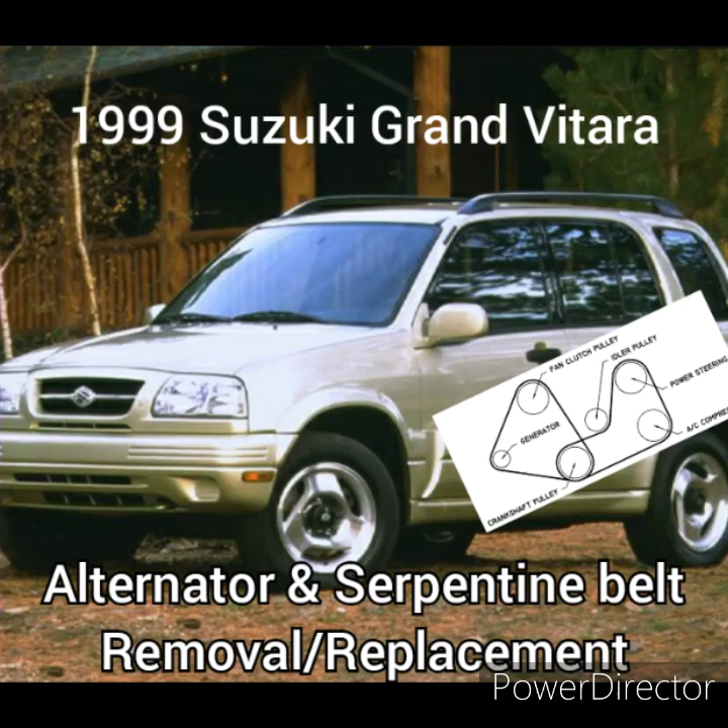Jason here again, working on my 1999 Suzuki Grand Vitara. It's been about two years since I put out the first video on replacing the radiator. Never had any problems with it since then, and then the alternator belt breaks, so I had to replace that.

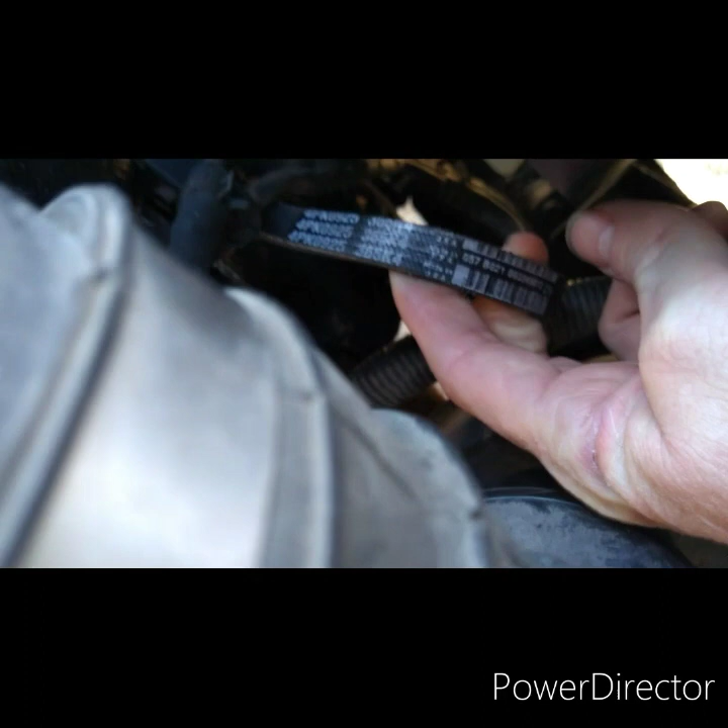What I've gotten done so far is this. This is the new belt for it. As you can see, let me get it turned right here so you'll be able to see the numbers on the belt. That way you know what belt you need for the alternator to replace it.

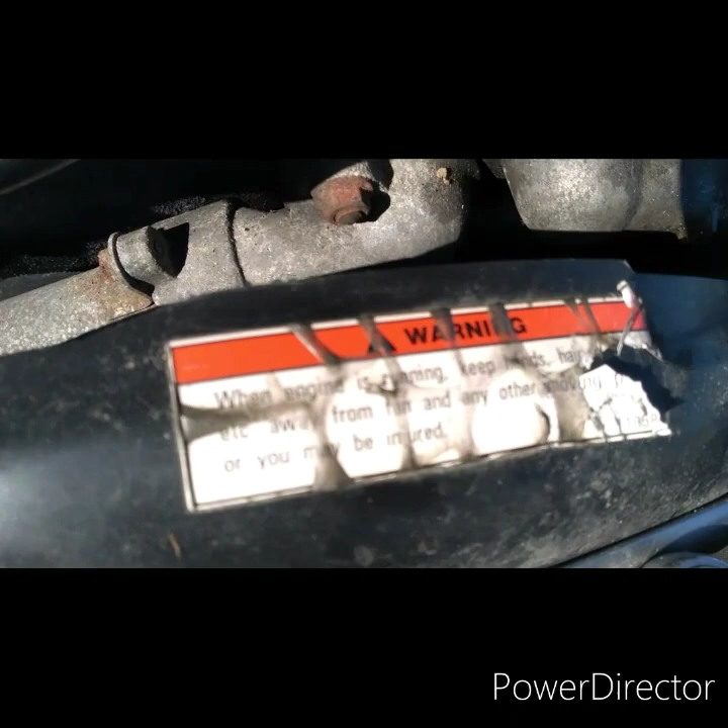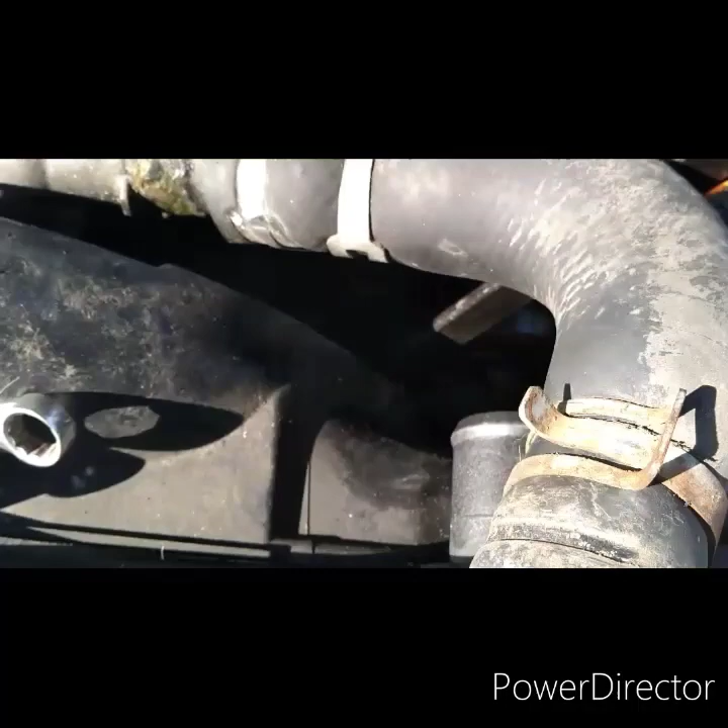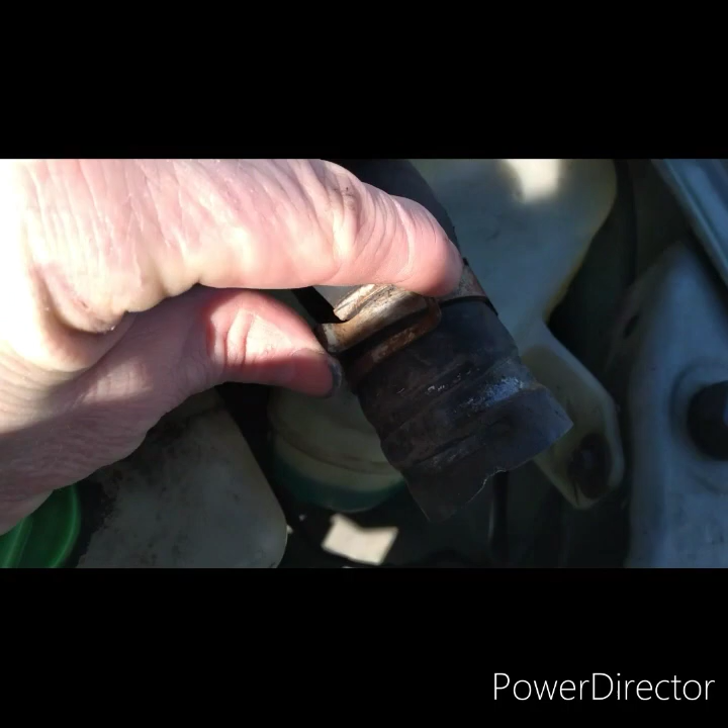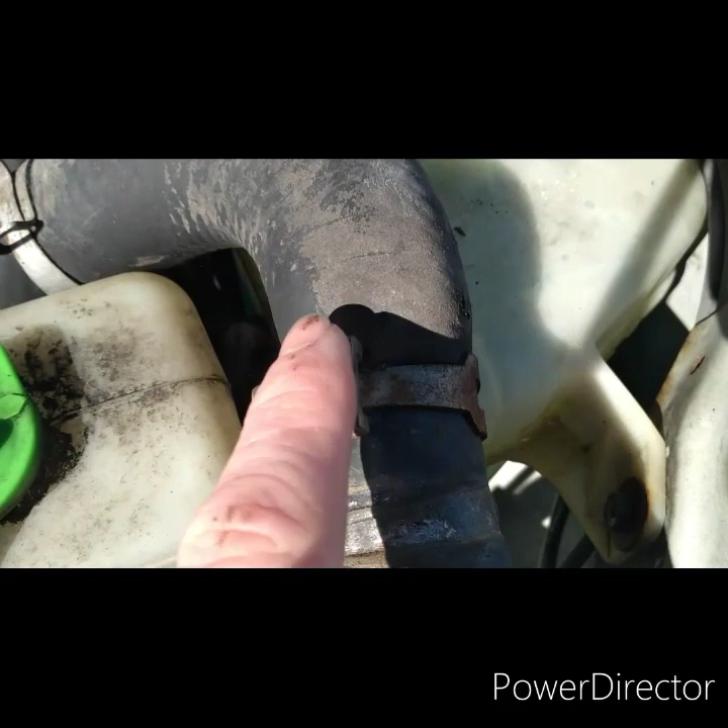But first, what you need to do is take off the serpentine belt, get it loose, take it off, then you can get the alternator belt back on. So I've had to take off the top hose to the radiator to get that out of the way. It usually just has these clip-on type fittings, or press fittings. You just take a pair of pliers, press them together, and it releases. To me, it's easier than using old-fashioned hose clamps, but if these break or fail, you can always just use regular hose clamps.

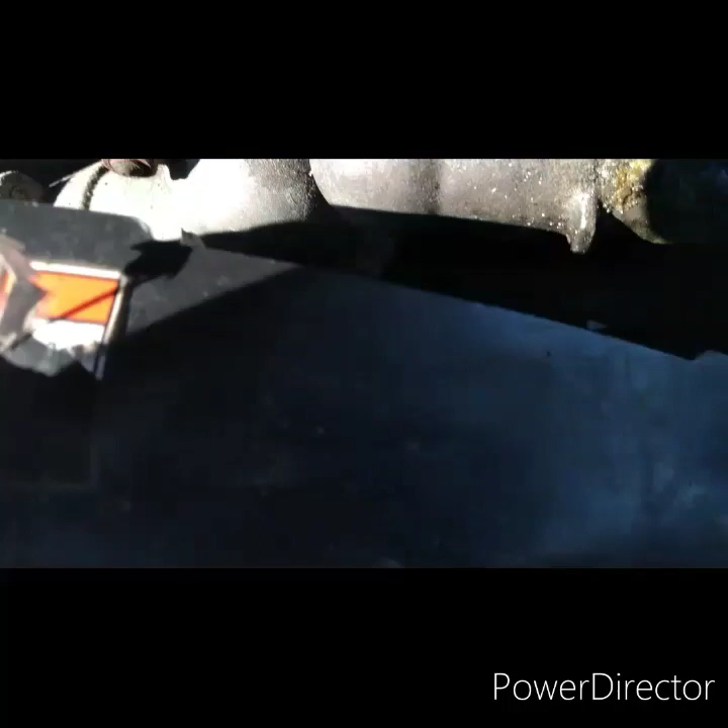Then the next thing is, you've got two 12mm bolts right here, right down here where I'm pointing this wrench at. One there and one there, side by side. You got to get those loose. You don't want to take them all the way out unless you plan on replacing the pulley itself, but I think my pulley's fine, so you just loosen those bolts.

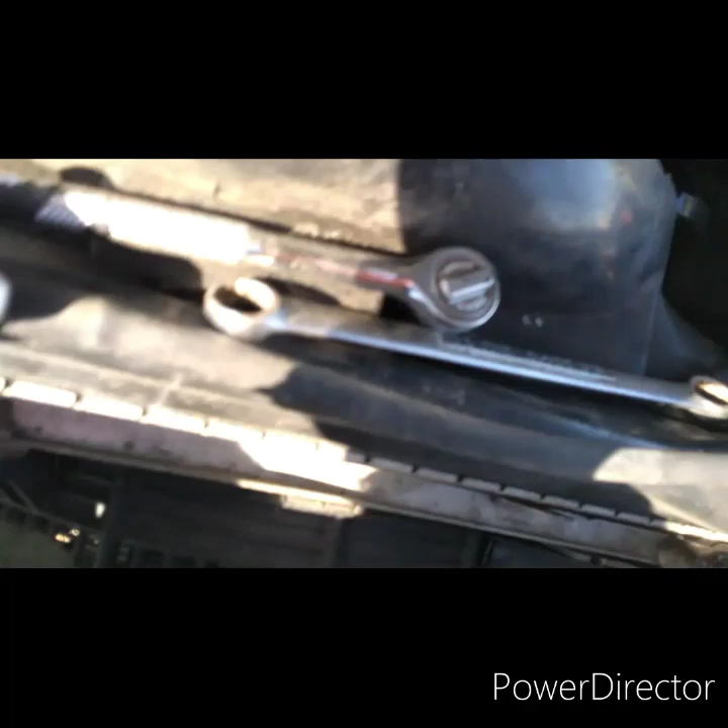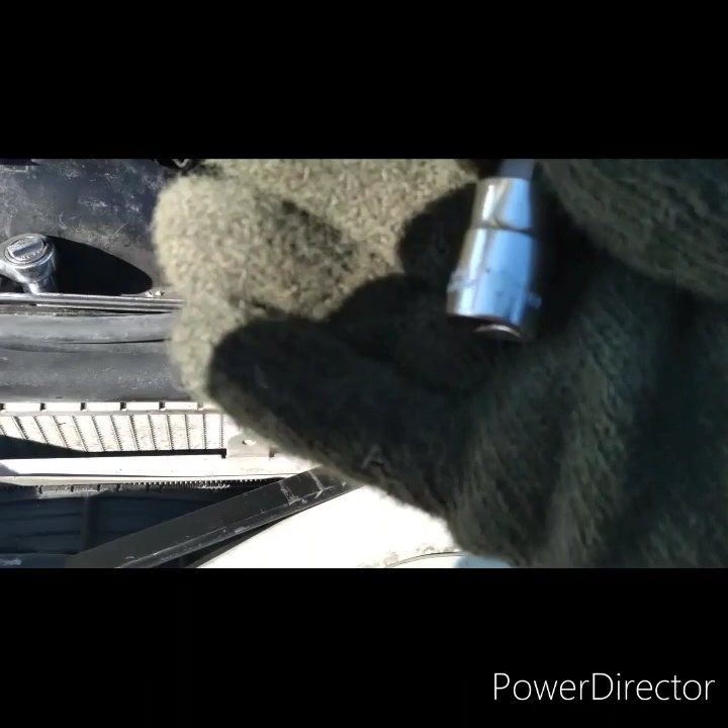It takes a 12mm socket, and then you got to get... let me get that back out here. Get that out of there. Then you need a hex head socket, which is a 10mm socket, as you can probably see right there, hopefully my phone camera's good enough.

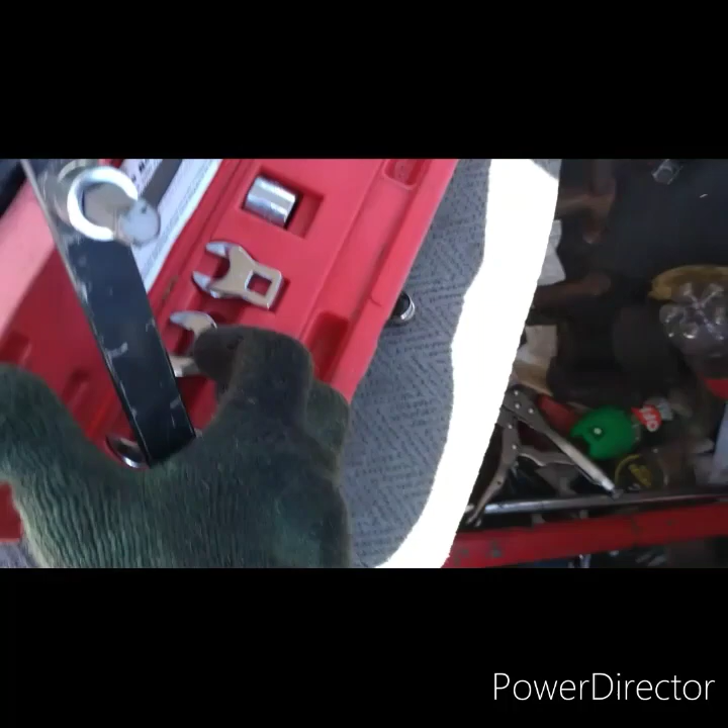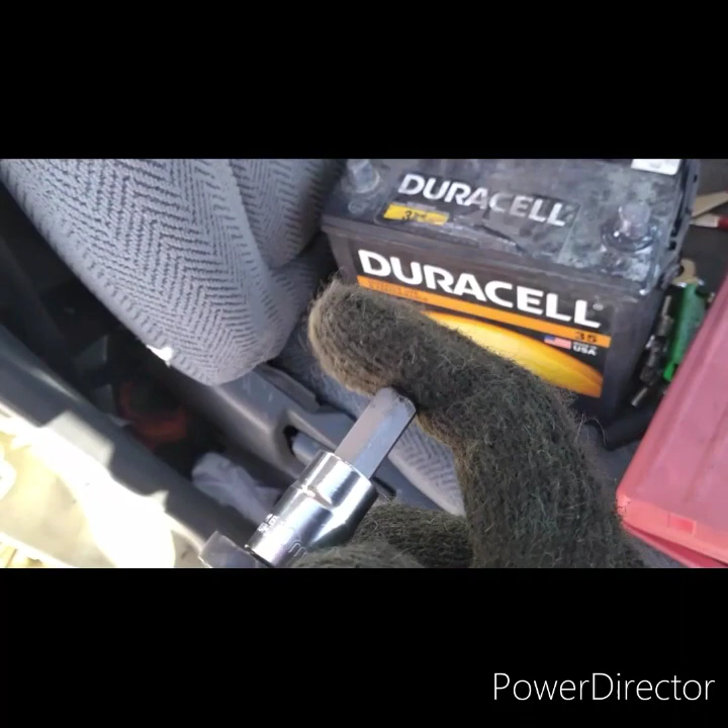What I've been using is this tool here, a serpentine belt tool kit. This is the whole kit right here, and this is the main bar I use. But naturally it doesn't come with the hex head sockets, you have to buy them separately. This cost me about 30 bucks from AutoZone, and I bought that about two years ago.

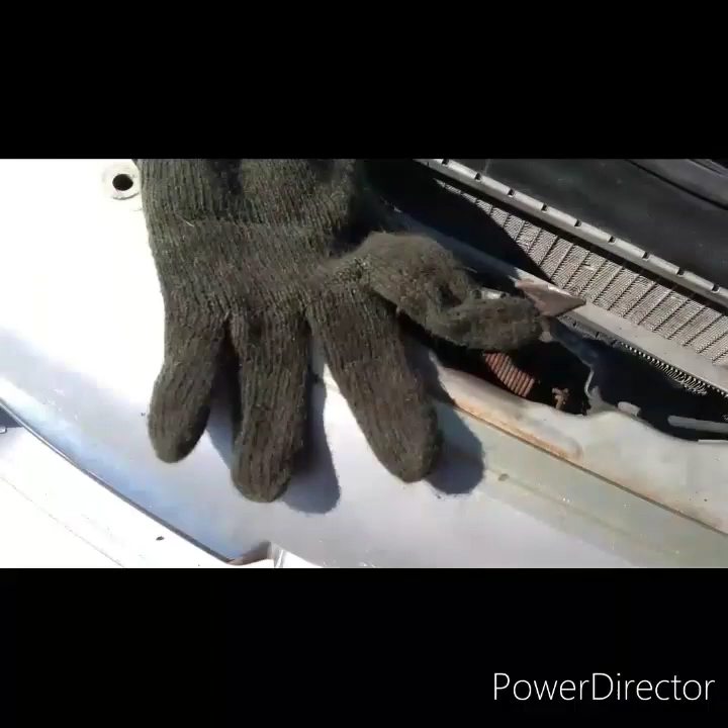The problem is the weld broke on the spoke here, so I had a friend of mine at work weld it back for me. Shout out to Carrie Turner for doing that for me, saved me 30 more bucks from having to go buy a new one.

So once you get those two bolts loose, you can put this in. There is a hex head hole in the middle of that. Like I said, it takes a 10mm hex head socket to get in there, and you don't have a lot of room to work between the fan and the fan shroud. So it's just a matter of getting that sucker down in there.

Get it back in there. It's hard to do with one hand. Come on, get in there. Okay, there it goes, I think. Then you see, if you push to the left, you're just tightening it, but if you push to the right, you loosen it, which I need to come over this way a little more.

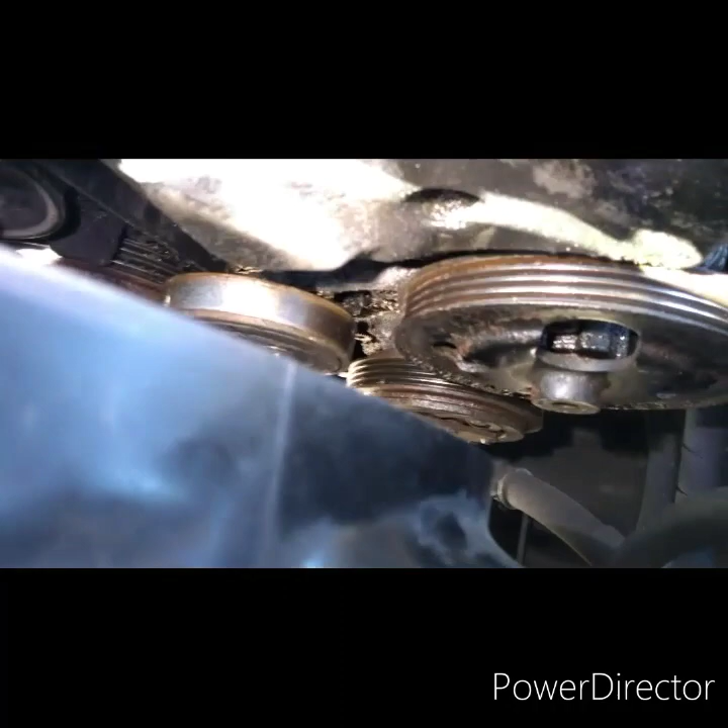Now I had to do a little finagling. Had to take that thing back out of there to get this out. Hold on. Okay, so I had to get the camera in here. Okay, where's the belt at? Okay, so I finally got the serpentine belt off.

Once you get that loose, you have to pretty much take it out from underneath. That was the best way to get a hold of it, because I couldn't get a hold of it from up top, there's such limited space to work. But, I got the belt back on.

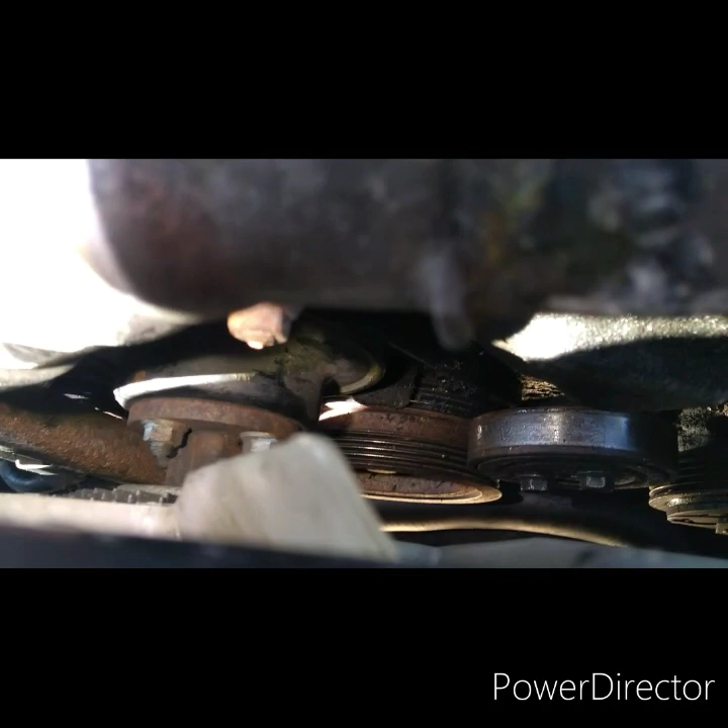The alternator belt goes on the main pulley in the back, onto the pulley for the fan, and it goes all the way around here to your alternator. Yep.

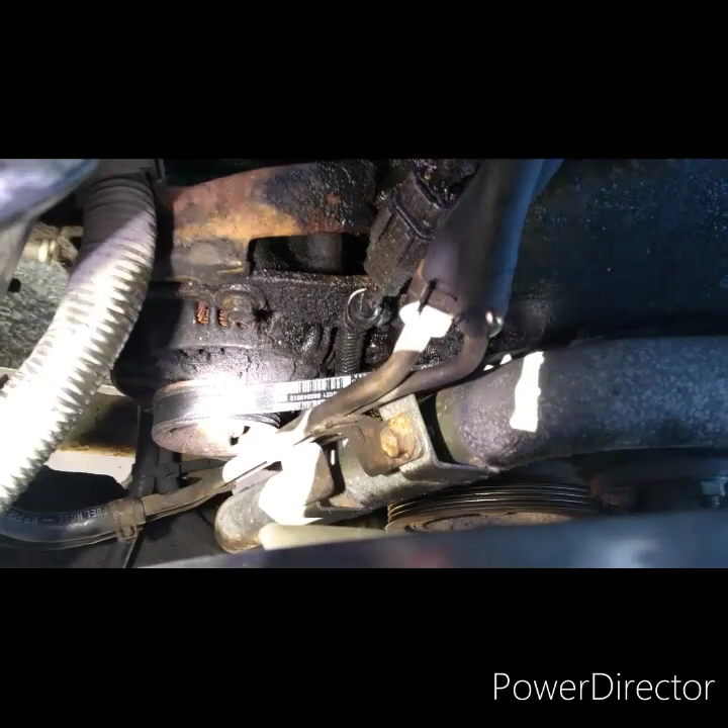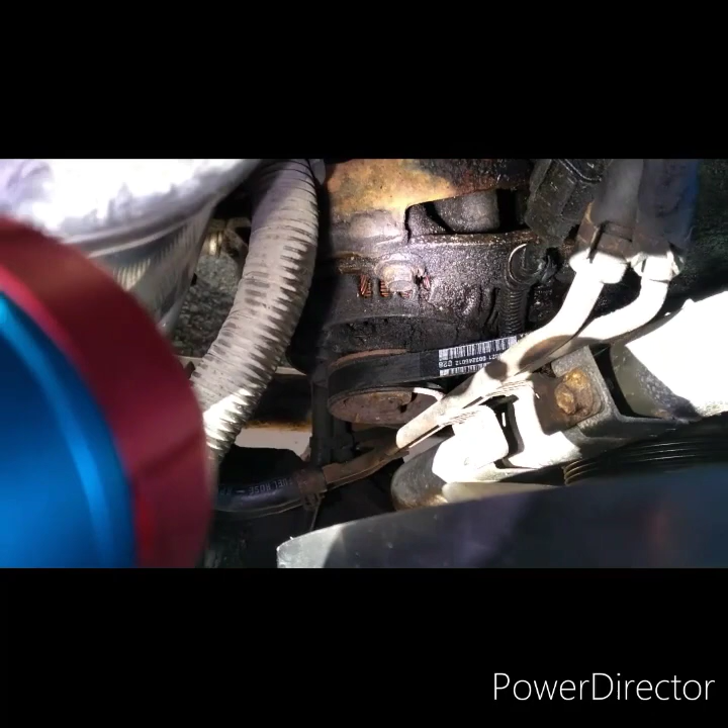Once you get that on, it's just a matter of tightening up the alternator back. That top bolt there is a pivot bolt, you got to pry it back with a tool, which I'll probably end up using my big serpentine belt tool again, to pry it back enough to tighten that, and then you got to tighten the bolt underneath. So I'll do that first. Bear with me, and I'll be right back.

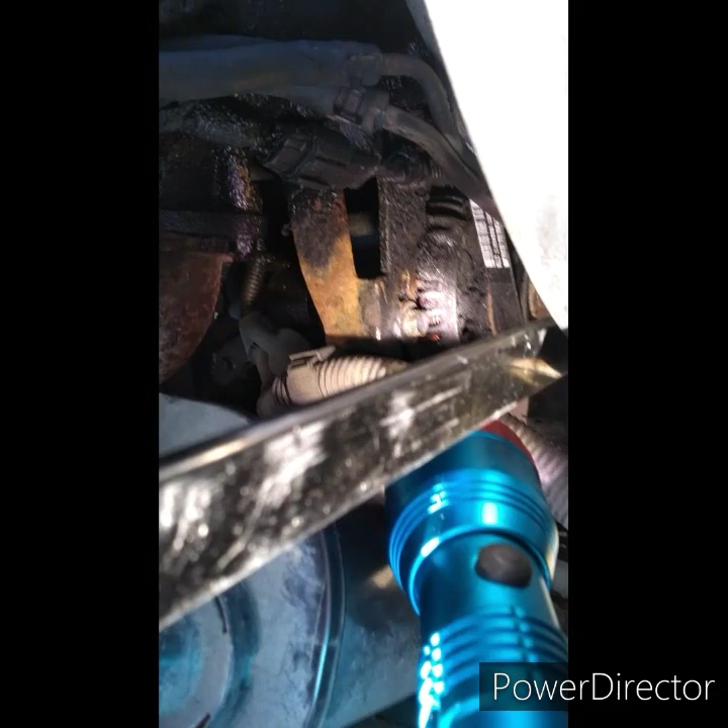Okay, what I've done here is I've got the top bolt on the alternator, got it tightened back down. Had to pry the alternator back far enough to where you can get that bolt, a 12mm bolt, tightened back again. And you got to use two hands, so you can't hold on to a camera or a flashlight and do it at the same time. So that's why I had to shut the camera off.

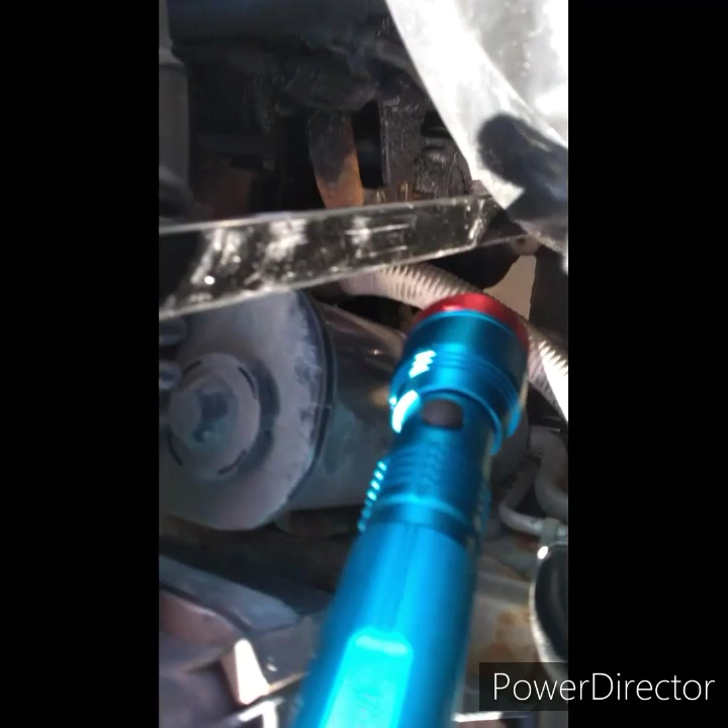But now I've gotten this far. I had to take my long bar here and get the camera in there, and the flashlight. And you see where I had to take an extension for my 14mm socket, which is the size you need for the bottom bolt. And then you can tighten down on that. So you want to make sure you go...

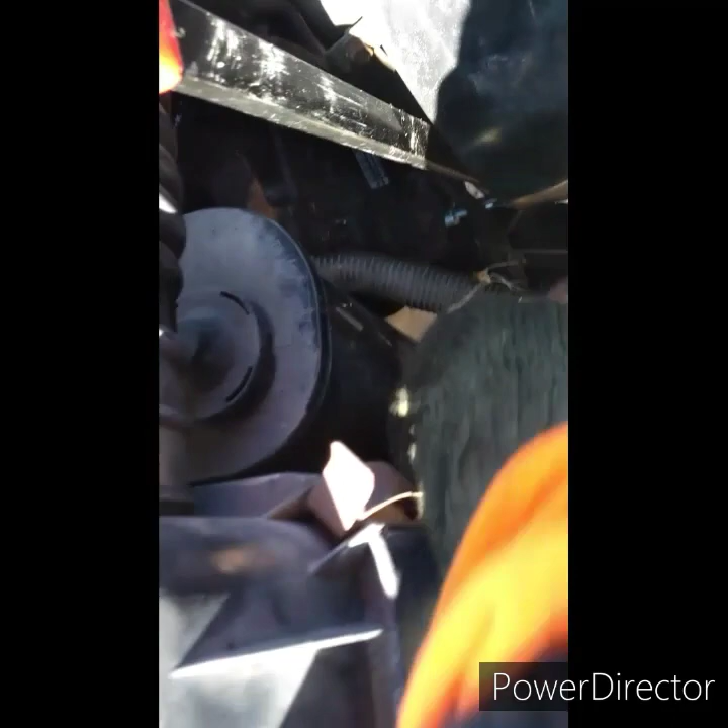Come on, goddamn flashlight. You want to make sure you go righty-tighty, that's the thing you always remember. It's lefty-loosey and righty-tighty, so it should be easy to remember. So you go to the right, and you just get it as tight as you can get it.

The problem with having to do it this way, I don't have a socket wrench that's got a long enough handle so I can crank it. So you gotta go like that, take it off, and then you have to come back, find the bolt again, and then you gotta tighten again. So I only have to go one more revolution over, and I can't do it with one hand and one hand holding the camera. So I'm gonna have to shut this off, bear with me for a second.

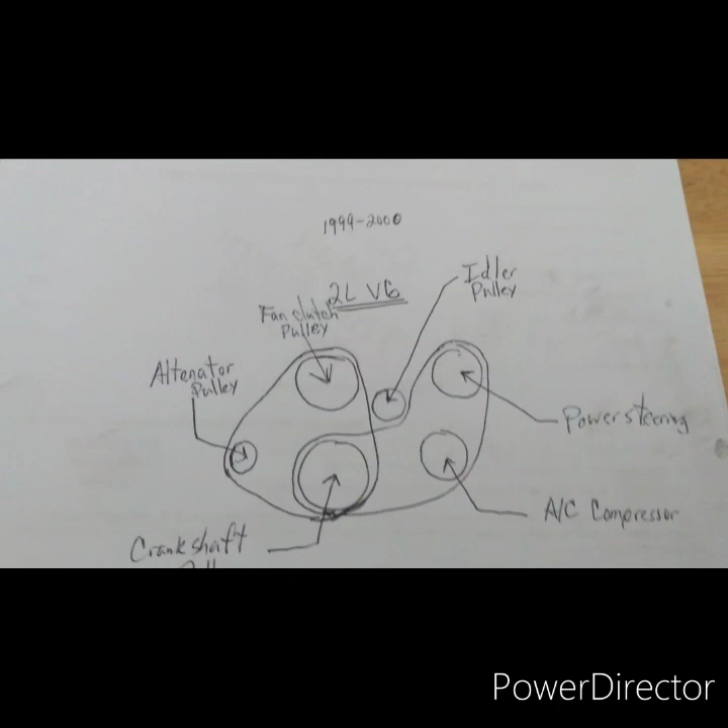Take a small break. I was getting a little pissed off, so decided to come in and let my phone charge up a little bit. Plus I want to go ahead and draw out this schematic.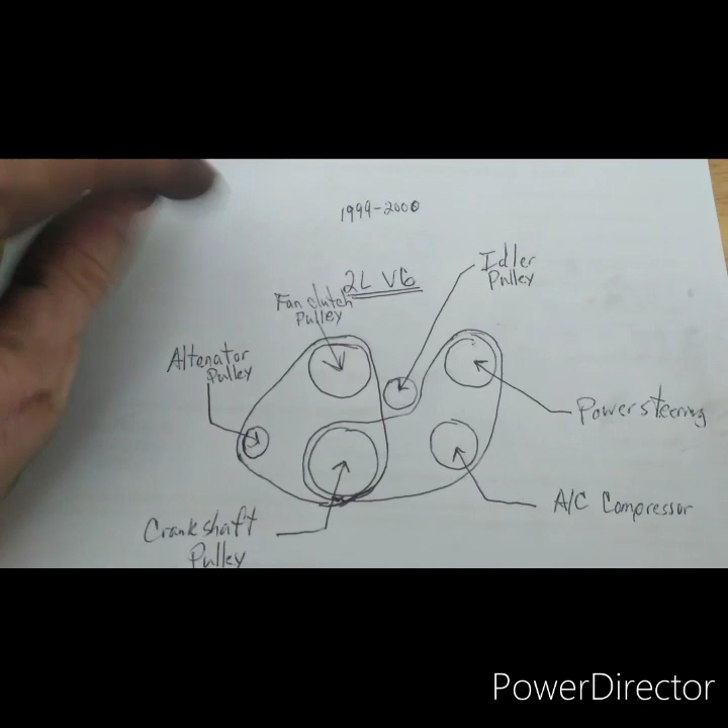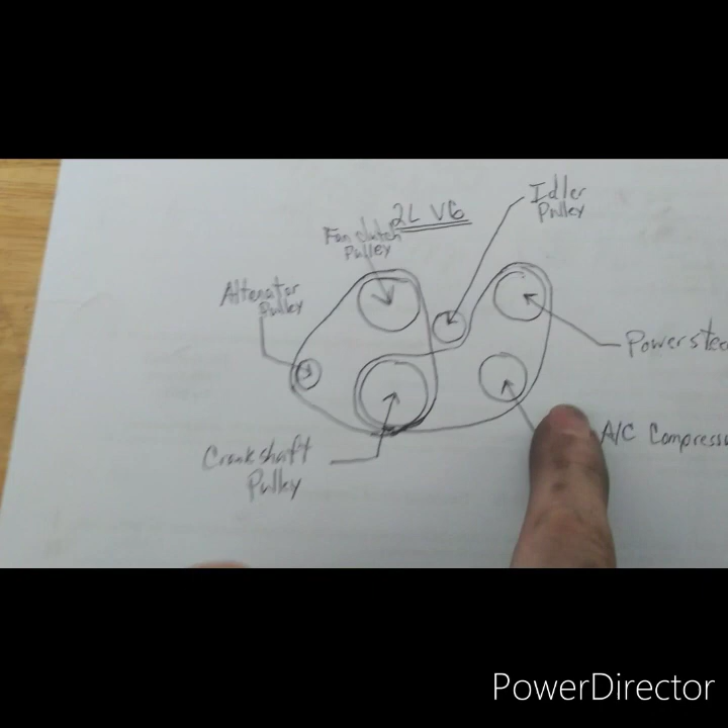So it's for the 1999 and 2000, I'm not sure if any newer than 2000 or not. But it's a 2-liter V6 engine, and this is how the setup is set up. You got your crankshaft pulley right here, your AC compressor pulley, and then you've got your power steering pulley. And then right there's your idler pulley, and that's your serpentine belt. It's two separate belts instead of one single belt that runs everything.

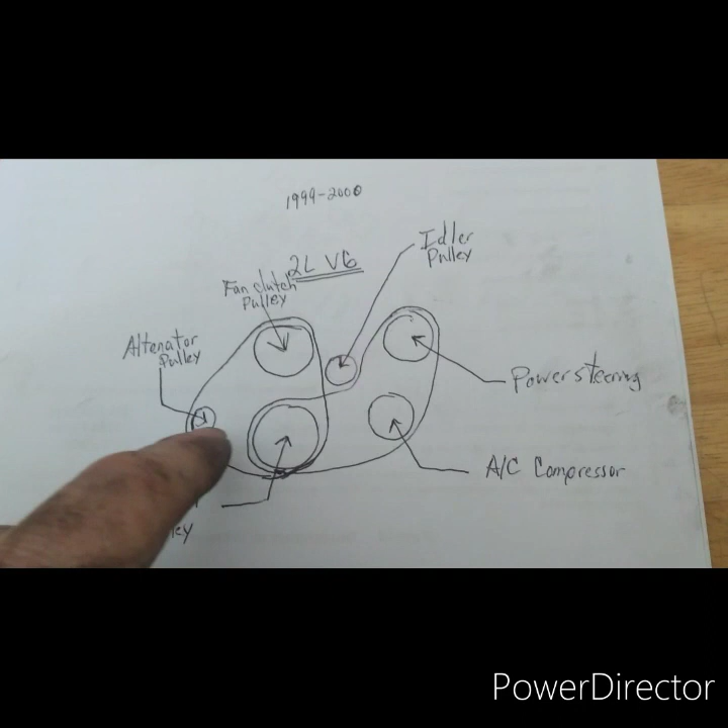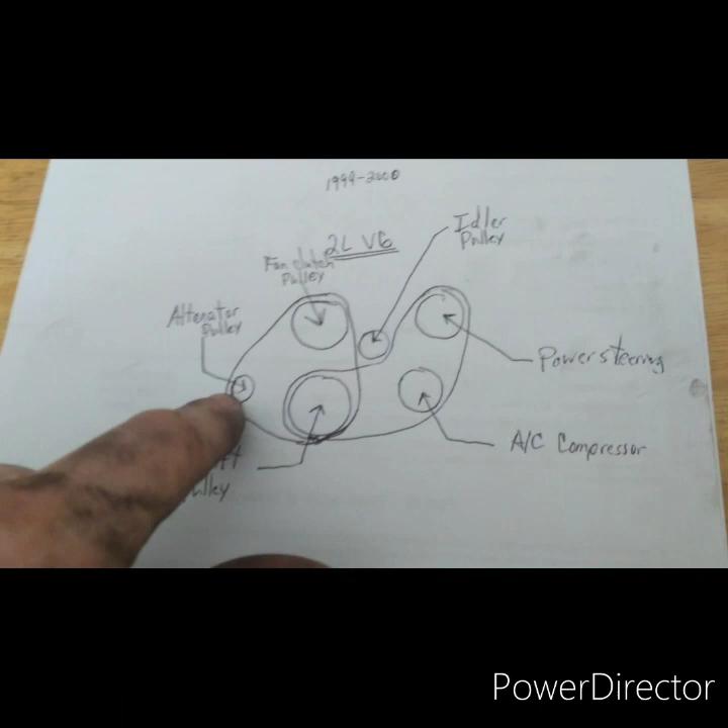So you got the serpentine belt, which you have to take off first, so you got to loosen up that idler pulley, get that off, and then you can either take off, or if it's already broken off, then you just need to put the new alternator belt on this side of it. There's your crankshaft pulley, and there's actually a bigger diameter pulley behind the serpentine belt pulley. And then that connects to your alternator pulley, and it connects to your fan clutch pulley.

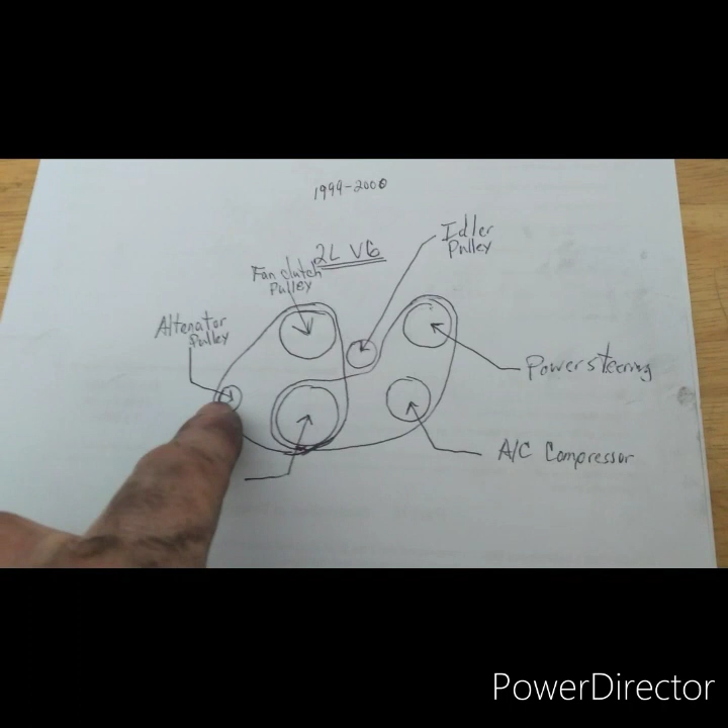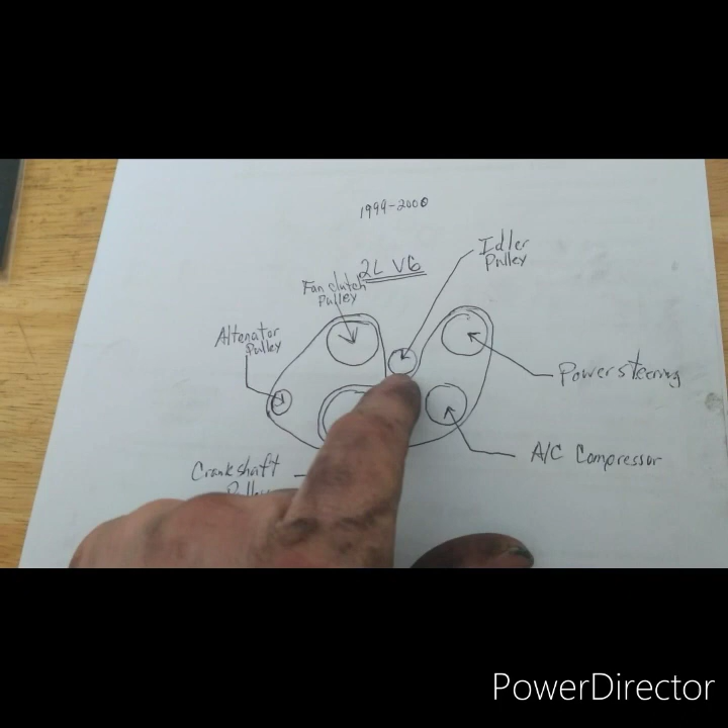So once you get that on, and get the alternator tightened back down, get it pulled back tight enough, you want to give it maybe a 1/4 inch of play. I mean, not too tight, not too loose. So get that tight, and then you can put your serpentine belt back on, and then bring your idler pulley back down in, make sure it's about a 1/4 inch play there, and then you want to tighten the 2 bolts that are on there, which I guess I can draw that on there to demonstrate.

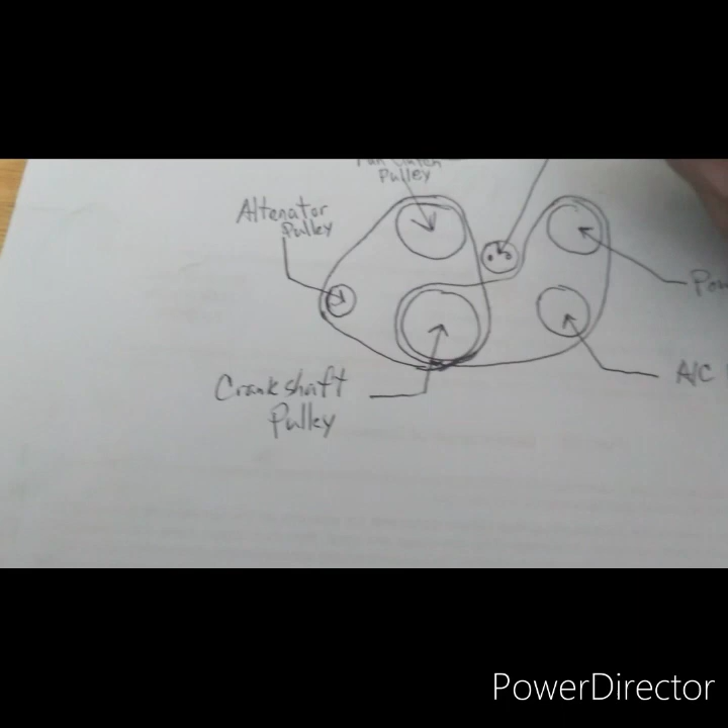Yep, your 2 12 millimeter bolts back down, and then you have it done. So I'll show you that here in just a minute.

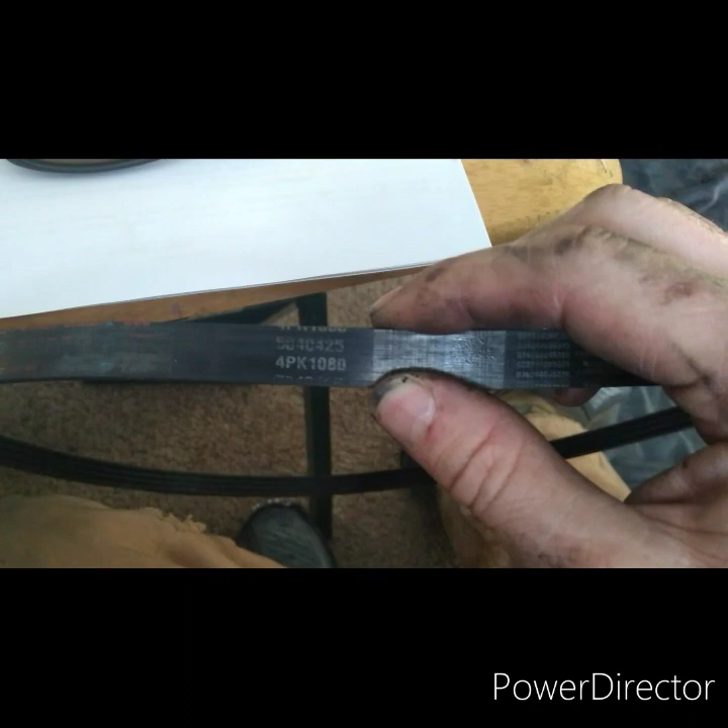And I want to make sure that everybody knows that those are the numbers for the serpentine belt if you need to replace it. Mine is doing pretty damn good, there's no cracks in it, it's not worn out, so I'm just going to put it back on.

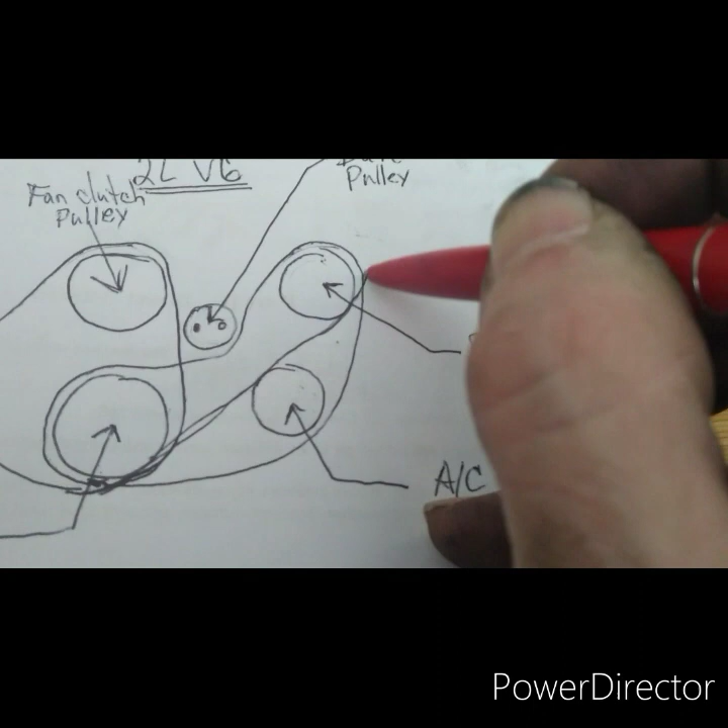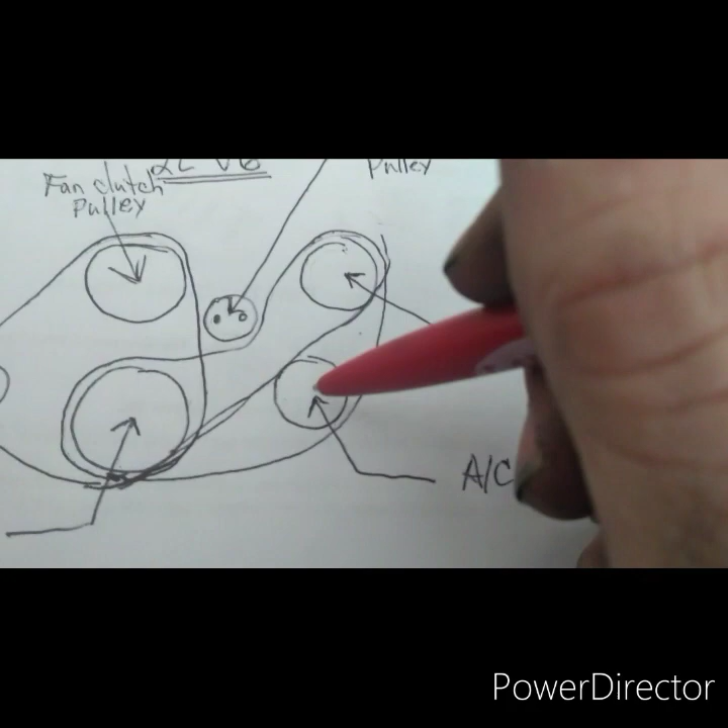It'll be fine. But yeah, if you go without your air conditioner unit though, you need a smaller belt. I'm not sure what the numbers are on that, but on the schematic, it shows you'd be going without that, so it'd just be one belt going through here. I'm not sure how that would work without it rubbing against that. I mean, I'm guessing there's a way, but I haven't really looked into it that far, because even though my air conditioning unit doesn't work in my car, which I really don't give a damn, I'd still rather just replace this one back on instead of getting a shorter belt. So might as well just go with what's been working.

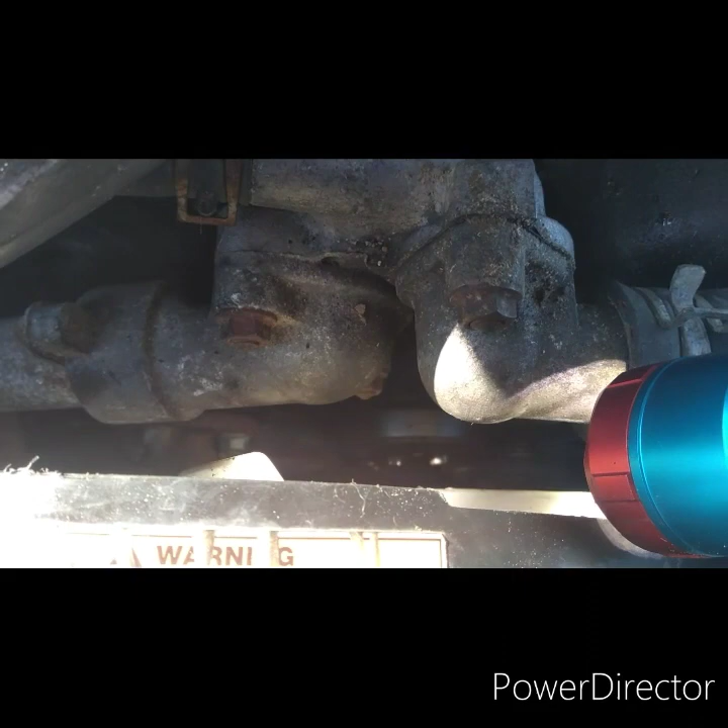Okay folks, we've got the belt back on. Get the flashlight in there. Yeah, get it back on and everything. You just gotta make sure it's all lined back up where it's supposed to be. Then you put your tool back on there, and you pull back to the left to tighten it. You want to make sure you get the belt about a quarter inch loose, not super tight.

This thing won't focus, piece of shit. But you can kind of see the two nuts there. You'll tighten it up on one side, then you gotta use a crescent wrench, a 12 millimeter crescent wrench, and I tighten the one on the right first, get it tightened down real good. Then you can take the tool completely off, because then you got more room to work. Then I just take my socket wrench with a 12 millimeter socket and tighten the other one, get them both tight, make sure everything's set right.

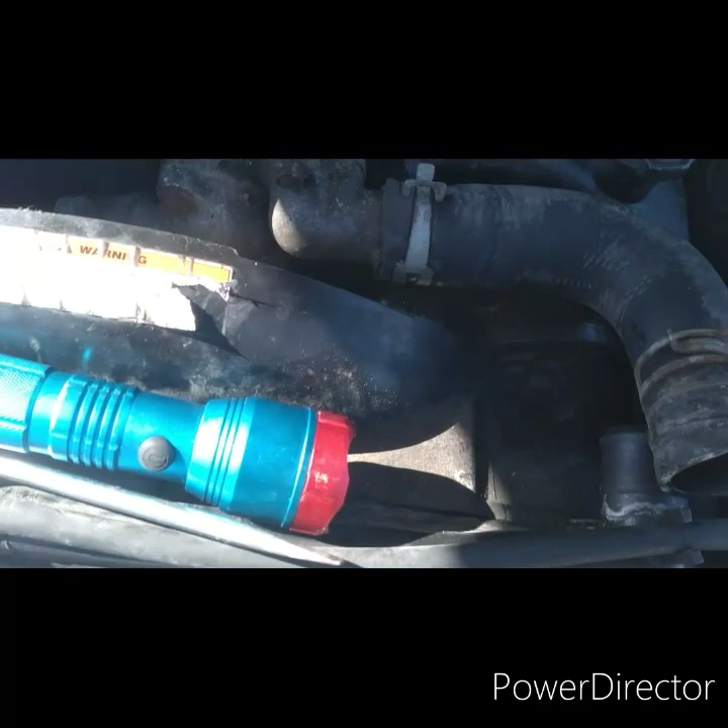Then all I gotta do is put the upper radiator hose back on. Like I said, it just has these clip-on clamps. Let's shut that light off now. So I just take my pair of pliers to it, and you just clamp down on it like that.

You gotta pull the pipe back in. Set the phone down for a second. I can't see anything, but at least you can still hear me. Okay, got it. Back on there. Come on, phone. Jesus. Okay.

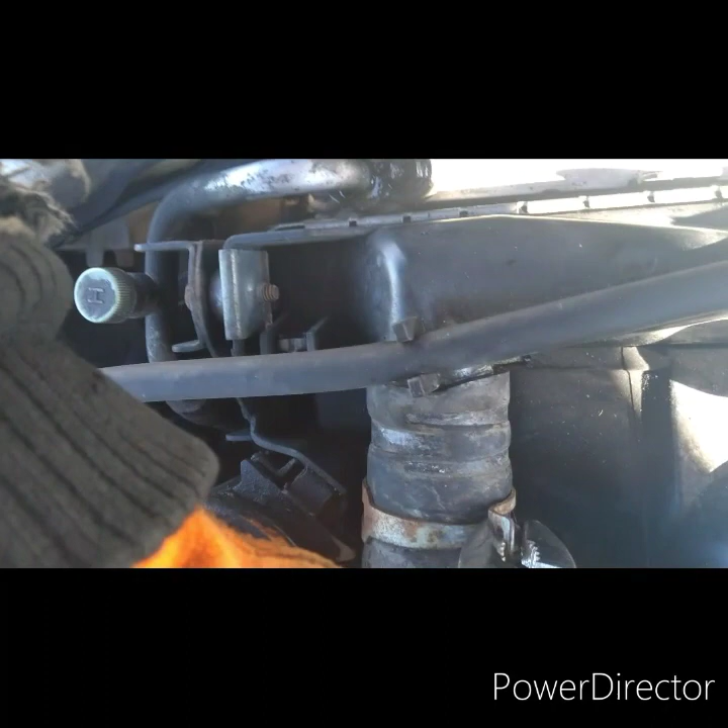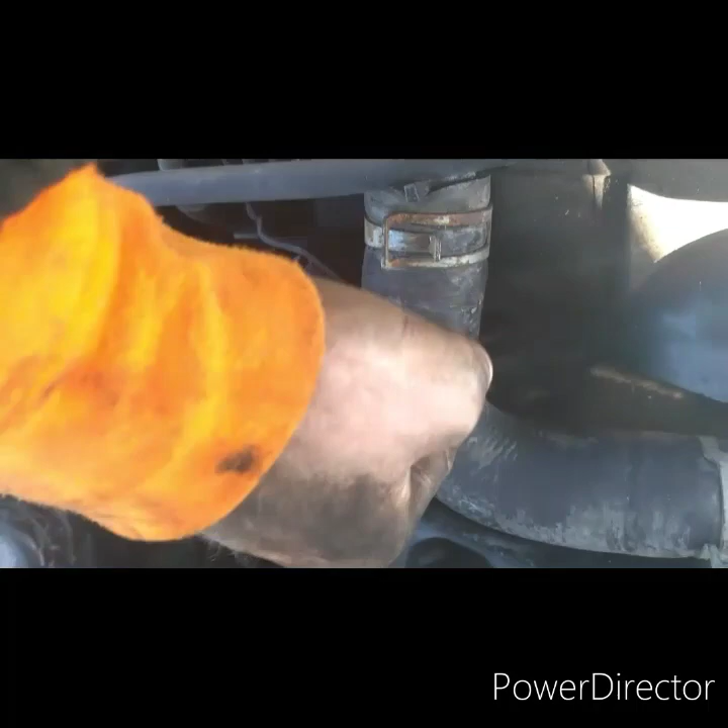Slip that hose back on. And then you gotta get this clamp on. There you go, get it in there. I try to get exactly where the original markings are. If you're just putting the original hose back on, then you just let go, and it's on there. You don't lose much antifreeze when you pull that off, so I'll check it later and make sure I got plenty. I'm pretty sure I still do.

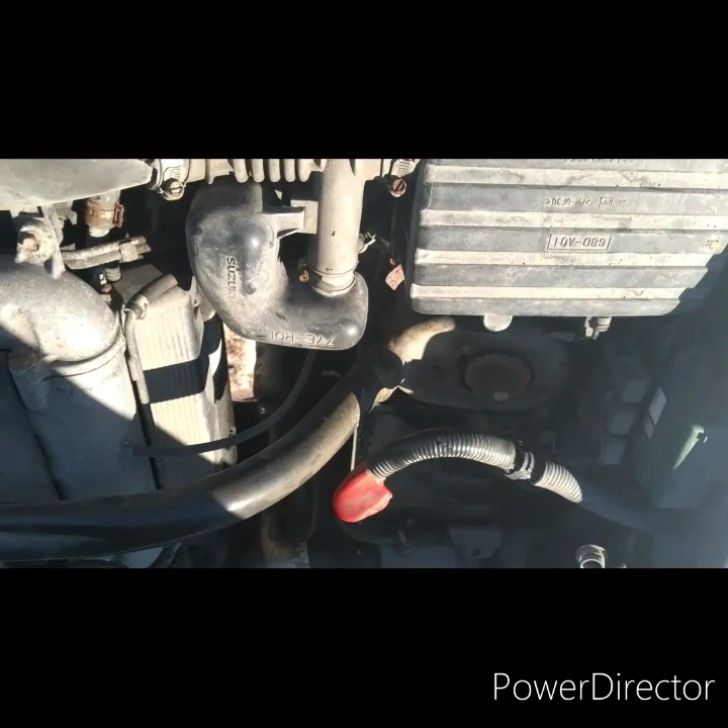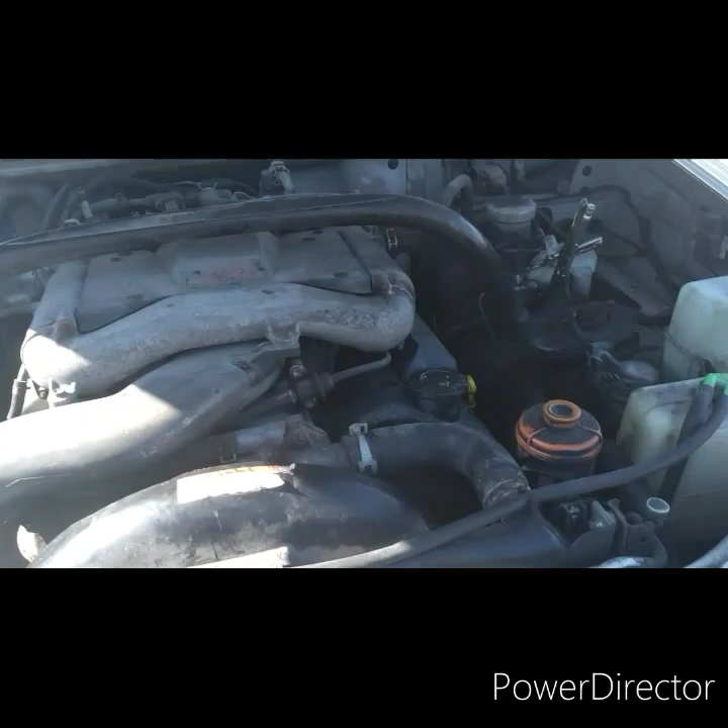But I'm going to go ahead and get ready to start it up and make sure the son of a bitch runs no problem. But first, I got to put the battery back in. Be back in a minute, folks. Alright folks, got the battery put back in. Turn it back on, everything, got all my tools and shit off top of the engine. It's ready. The moment of truth.

This son of a bitch starts up. Well, the only light that's on is the airbag light, which when it gets really cold out, for some reason that airbag light comes on, but I don't give a shit, this thing's so old. Plus it's so small, if it got hit, I'd probably be done for anyway.

Alright. A little bit of smoking is from the antifreeze that came out when I pulled this off. Got all over the engine. Everything seems to be going good, both working, lighting on there. Hard for me to see shit, trying to hold the camera. Yep, it's all good. Alright, yep.

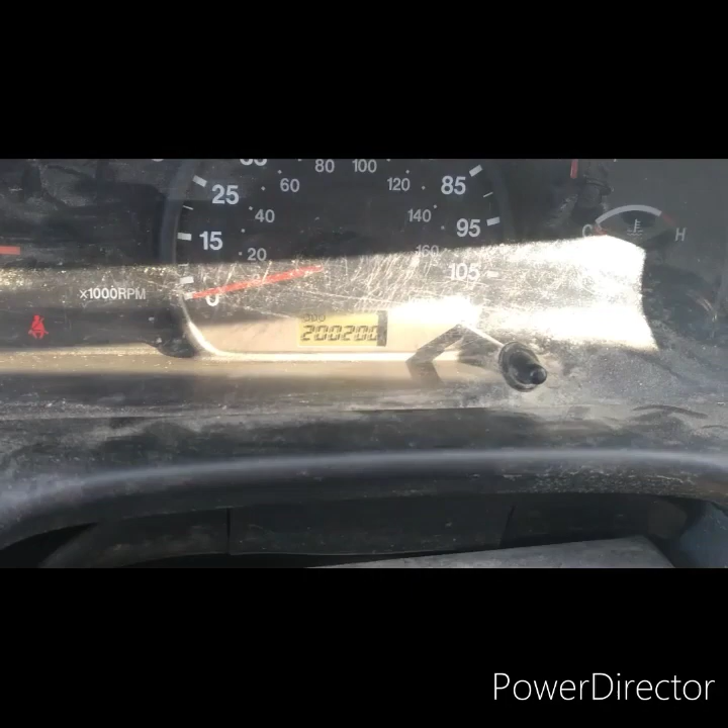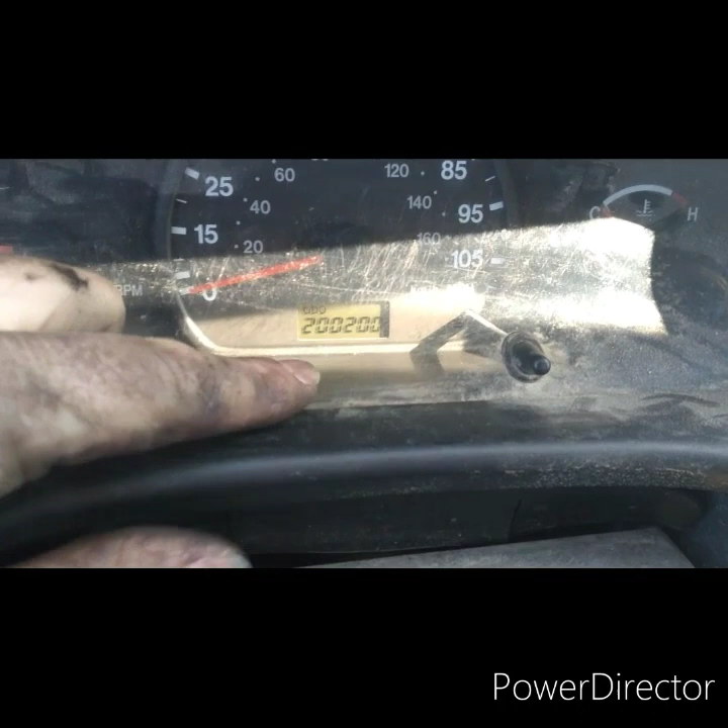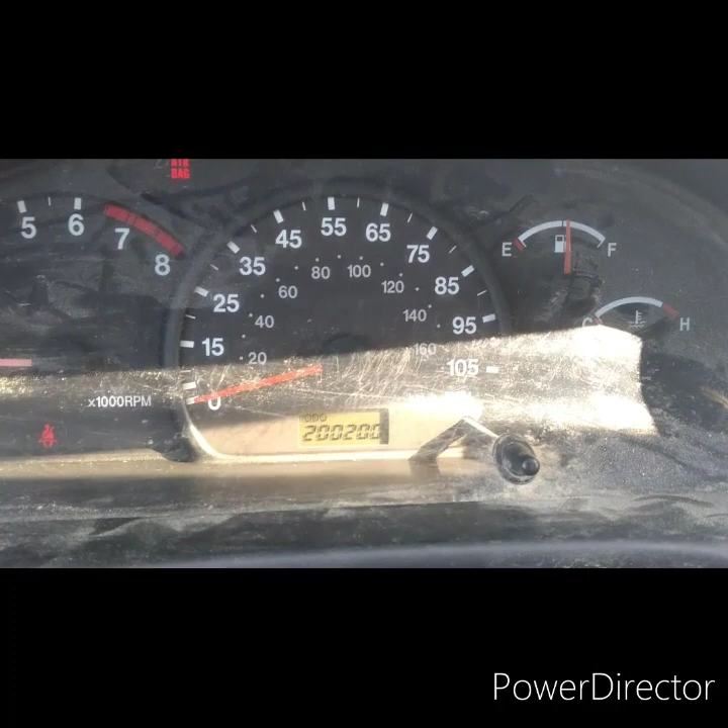Oh, and I didn't want to forget, but I want to show you guys this. It's just, my car's just past the 200,000 mile mark. So if you ever want a car that'll last you a long damn time, as long as you take care of it, these little Vitaras will last you a long time. Okay, talk to you later. Bye.